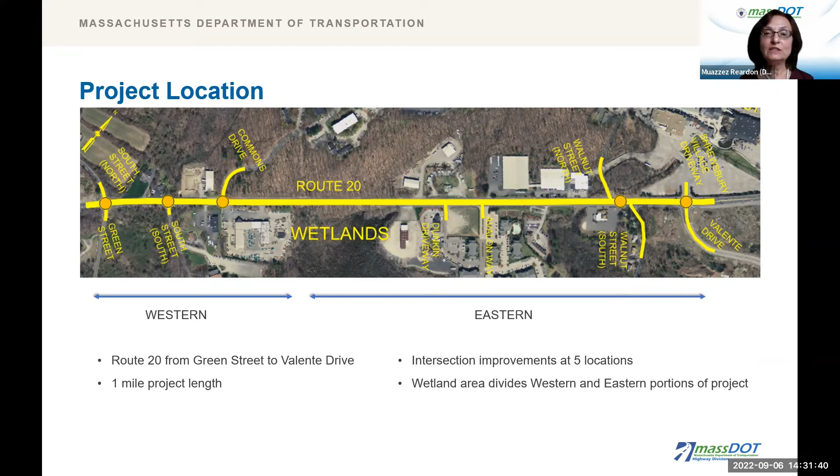For purposes of defining the existing and proposed roadway configuration, the project is split into two portions. The western portion of Route 20 within the project limits consists of 1 eastbound travel lane and 2 westbound travel lanes. The eastern portion of Route 20 consists of 2 travel lanes in each direction. In addition to evaluating the corridor, 5 major intersections were studied for improvements.

Previous to this project, MassDOT and the town worked together and prepared a master plan for the economic development of the Route 20 corridor within Shrewsbury. The planned developments along the corridor necessitated improvements to the Route 20 roadway. In February of 2020, the master plan was completed and the final public meeting was held the following month. The preferred alternatives derived from public meetings showed support for shared use paths, sidewalks, and turning lanes to improve safety and congestion issues.

In September of 2021, the road safety audit was conducted to evaluate the existing issues within the project area. After the road safety audit, alternative analyses were performed to guide the selection of the preferred alternative, which was completed in May of 2022. We will be discussing these findings with you during this meeting.

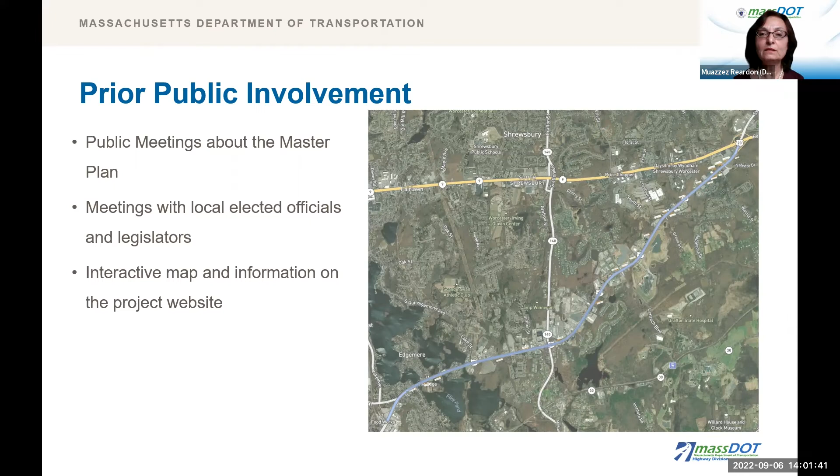Prior public involvement efforts included many public meetings regarding the master plan, including meetings with local elected officials and legislators. An interactive map was created for the initial design of the proposed Route 20 improvements, which can still be found on MassDOT's website. Now, District 3 Traffic Engineer Joe Frawley will discuss the existing issues, the alternatives studied, and our proposed design.

Thank you, Muazzez. Through the master plan effort and the road safety audit, several issues were identified within the limits of this project. The intersections of Route 20 at Walnut Street and Valente Drive are both identified as high crash locations by MassDOT. Additionally, the portion of the corridor between the wetlands and Valente Drive has been identified as having a significant rate of fatal and injury crashes.

Another concern that has been noted is high travel speeds along this section of Route 20. As part of the master plan effort, it was noted that anticipated developments near this corridor would increase the congestion that already occurs, particularly at the existing intersections. Some of the roadway deficiencies that contribute to the issues noted on the corridor include substandard shoulder widths, a lack of dedicated turning lanes, limited sight distance at side streets, and a lack of pedestrian and bicycle accommodation.

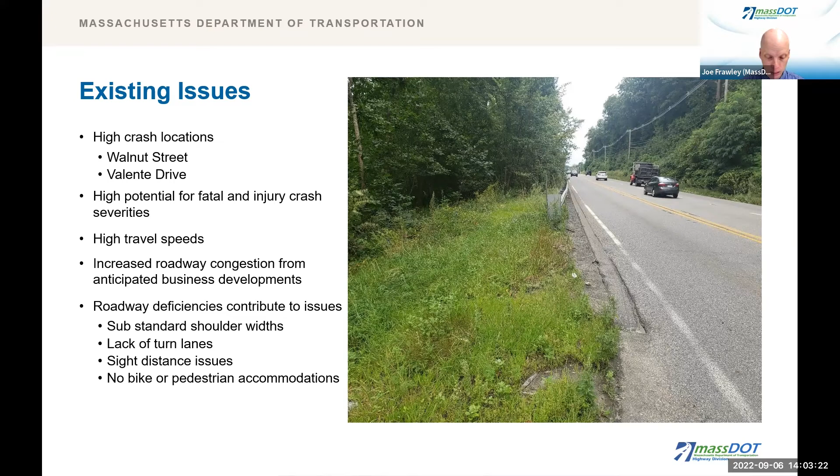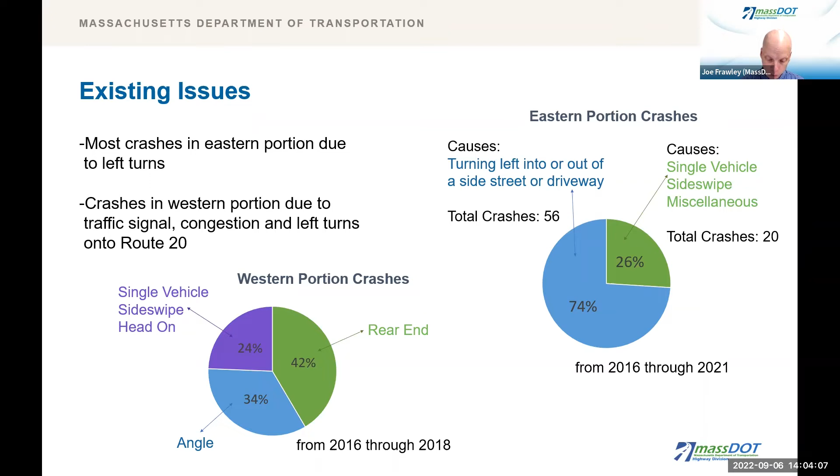During the alternatives analysis, MassDOT and our consultant took a closer look at the crashes to better understand what patterns can be identified. In the western portion of the project, many of the crashes are rear end crashes, which can be caused by congestion, additionally left turning vehicles and the traffic signal at the South Street Green Street intersection. It was found that nearly 3/4 of the crashes in the eastern portion of the project involved a vehicle turning left, either into or out of a side street or driveway.

What do we want to accomplish? The purpose of the project is to improve safety for all road users, including pedestrians and cyclists, to reduce high travel speeds, particularly to make it more difficult to travel the corridor at excessive speed, to accommodate future traffic, using projections that include proposed developments along Route 20, and to reduce congestion within the project area.

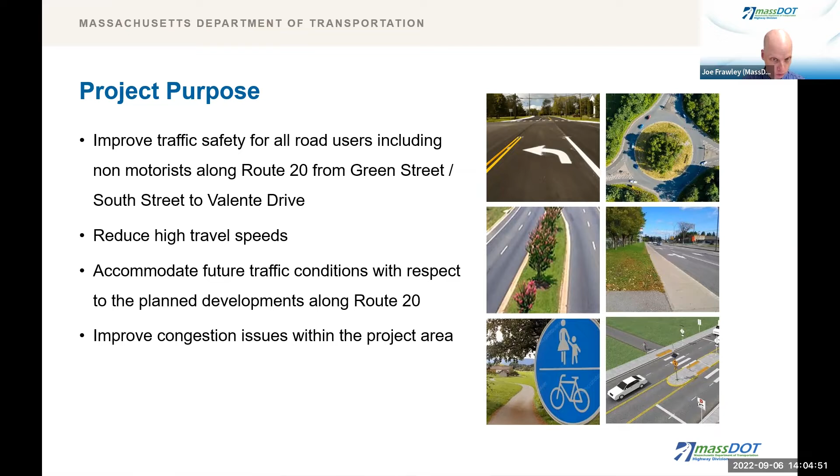What alternatives were considered? Before discussing the alternatives, I wanted to briefly show the existing cross sections along the roadway. There are 3 lanes in the western portion of the project, 2 westbound, 1 eastbound. On the eastern portion of the project, there are currently 4 lanes, 2 in each direction.

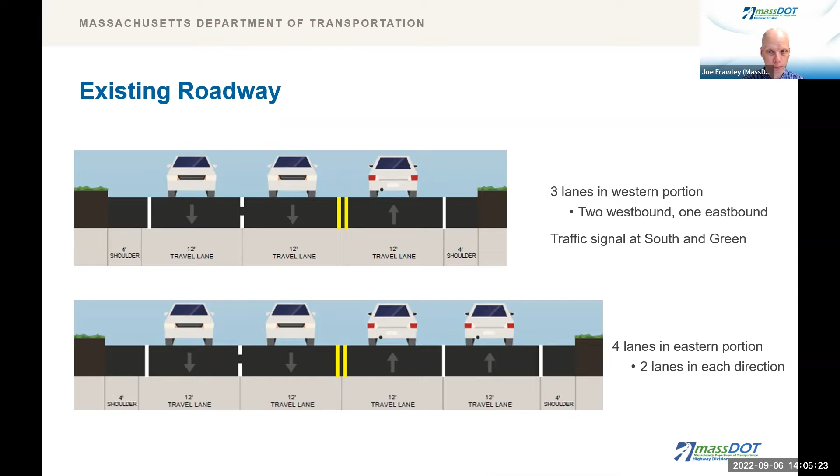This slide shows the existing control at each intersection. The South Street Green Street intersection is signalized. The South Street East intersection is not signalized, and left turns out were recently prohibited. The Walnut Street intersections are offset and both not signalized. The Valente Drive intersection is also not signalized, and both left turns and through movements out of Valente Drive are currently prohibited.

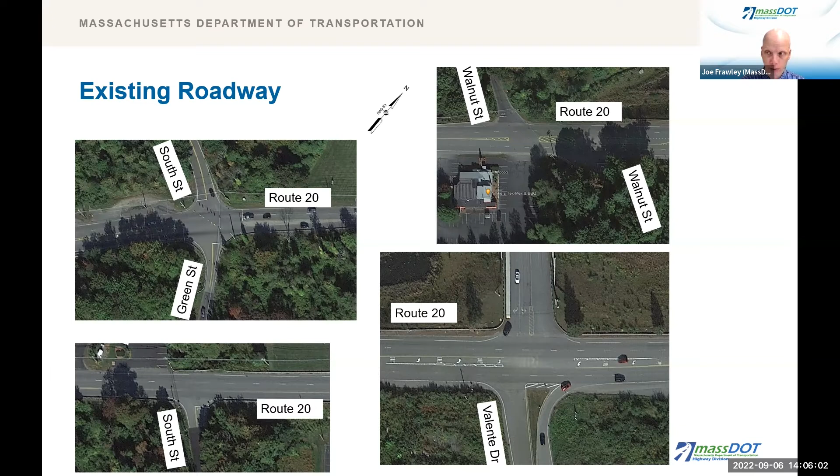The alternative 1 plan is the preferred concept from the master plan, with some minor adjustments to the cross-section dimensions to meet current MassDOT standards. This alternative provides a shared use path for pedestrians and cyclists on the south side of Route 20 and provides a sidewalk for pedestrians on the north side of Route 20.

The western portion of the project includes the addition of a second eastbound travel lane and dedicated left turn lanes at select intersections. The existing traffic signal at the South Street Green Street intersection is improved, and a new traffic signal is proposed at the Valente Drive intersection. On the eastern portion of the project, a two-way left turn lane is provided.

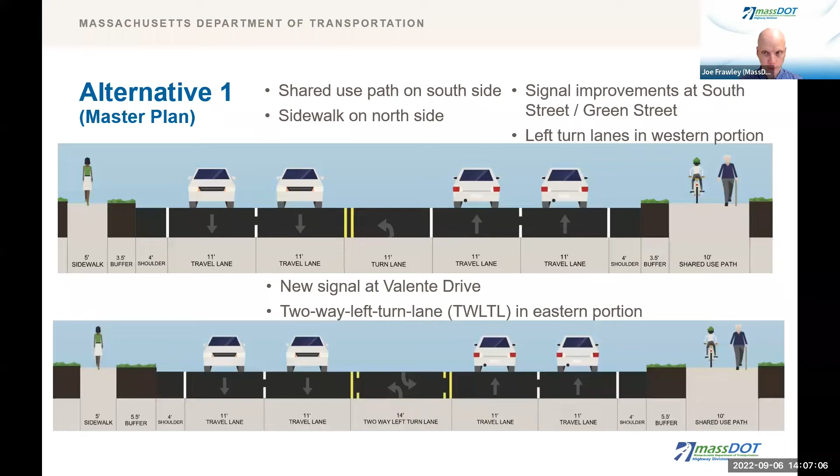This sheet shows in graphical view what is proposed as part of alternative 1. At the South Street Green Street intersection, the additional eastbound lane is shown, as well as additional turning lanes. And this shows that the traffic signal equipment is being replaced.

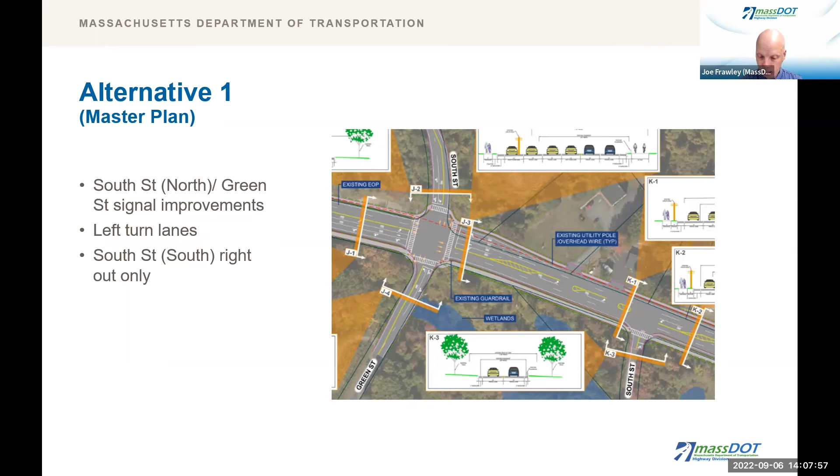At the South Street East intersection, the left turn prohibition is maintained, but a left turn lane is provided for people traveling on Route 20 westbound looking to enter South Street. As occurs today, people on South Street East looking to access Route 20 westbound need to find an alternative route.

During the master plan, a connector roadway between Walnut Street and Valente Drive was proposed to allow for turn restrictions at the Walnut Street South intersection, where Walnut Street South will be right in only. As I mentioned a few moments ago, the intersection at Valente Drive will be signalized in this alternative. The existing turn prohibitions exiting Valente Drive would be eliminated.

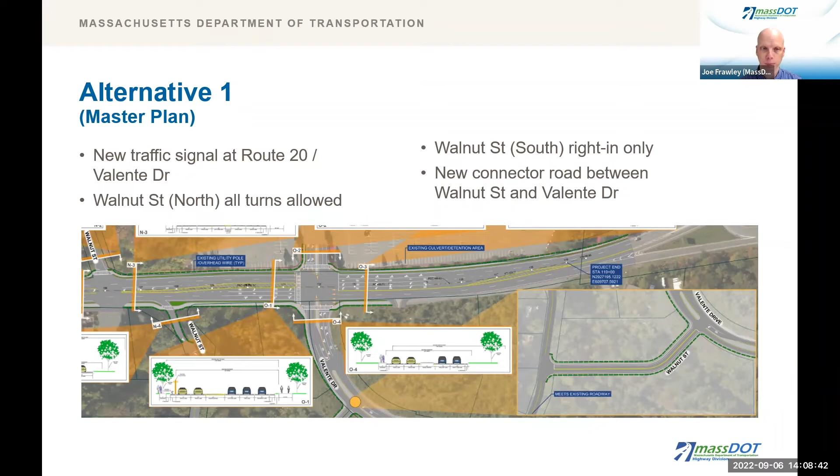Alternative 2 builds off of the master plan alternative. As in alternative 1, there is a sidewalk proposed on the north side and a shared use path on the south side of Route 20. As mentioned for alternative 1, traffic signal improvements and additional turning lanes would be provided at the South Street Green Street intersection. And South Street East would maintain the prohibition on left turns out.

However, alternative 2 proposes a roundabout at the Valente Drive intersection instead of a traffic signal. And a second roundabout is proposed near the middle of the corridor. Additionally, instead of a two-way left turn lane on the eastern portion, a raised median is proposed. This is the main difference between alternatives 1 and 2.

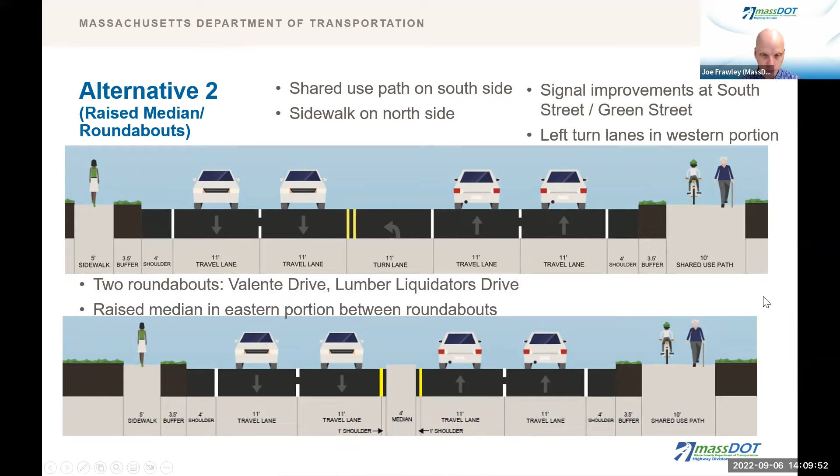What is the preferred alternative? The preferred alternative is alternative 2. MassDOT selected alternative 2 as the preferred alternative based on several factors, including safety, the ability to address the purpose of the project, and environmental considerations. We will now take a closer look at the proposed improvements for the different areas within the project.

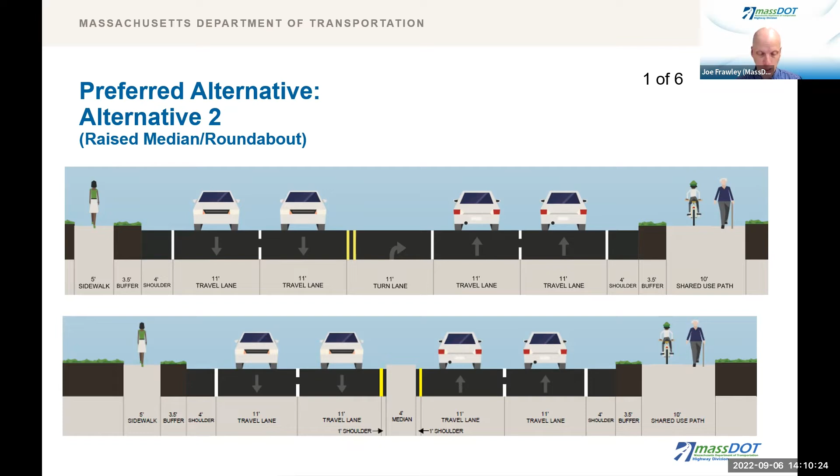The improvements proposed at the South Street Green Street intersection are very similar to those that were proposed as part of alternative 1. As mentioned for alternative 1, Route 20 westbound will have a left turn lane into South Street East, but South Street will be limited to right turn out only. No left turns will be allowed. With this alternative, vehicles will have the option to reverse direction at the proposed roundabout in the middle of the corridor, which is approximately a third of a mile away.

In the yellow color, this plan shows the 5-foot wide sidewalk that is proposed on the north side of Route 20 and the 10-foot wide shared use path that's proposed on the south side.

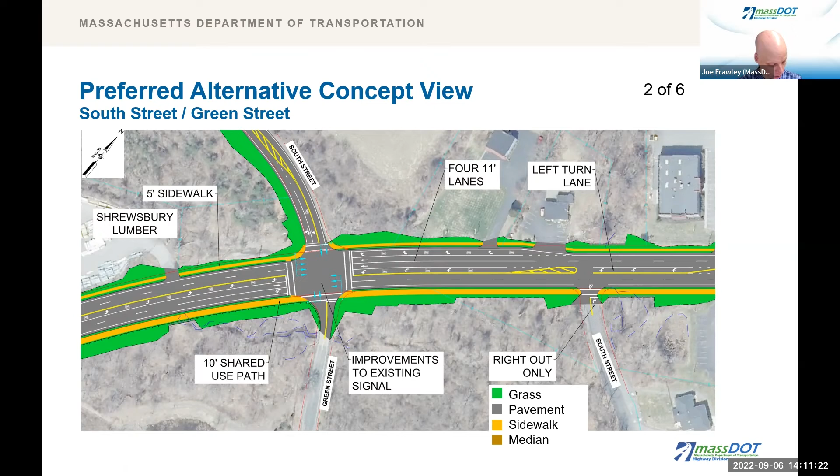Moving further east, the Sunbelt Rentals driveways will be right out only, and Commons Drive will be right out only as it is today. Left turn lanes on Route 20 will be provided for both Commons Drive and Sunbelt Rentals. A raised median will start on the western side of this wetland area. Retaining walls are proposed to avoid permanent impacts to Article 97 land that is present in this section of the project.

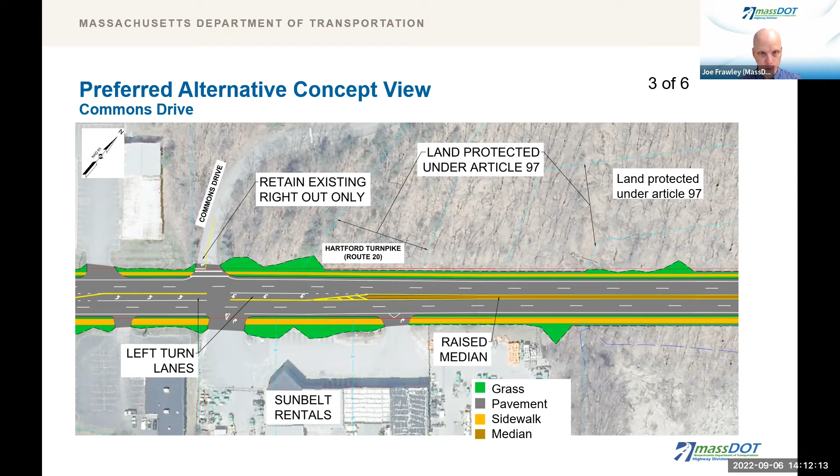A partial 2-lane roundabout is provided at the Lumber Liquidators and Rent-to-Fence driveways. The roundabout is located here to provide opportunities for vehicles to reverse direction to access all of the abutting properties between the wetlands and Valente Drive. The roundabout will be designed to accommodate trucks, including large tractor trailers. With the slower speeds at the roundabout, crosswalks across Route 20 will be provided.

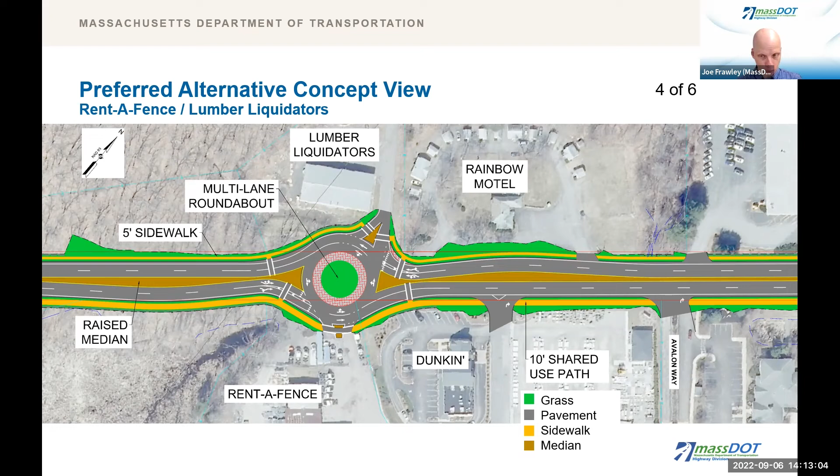A raised median is proposed between this roundabout and the proposed roundabout at the Valente Drive intersection. All driveways will be right in, right out only. The raised median is shown on this slide as well. And as mentioned previously, all driveways and the 2 Walnut Street intersections will be right in, right out only. As mentioned earlier, the Walnut Street intersection is a high crash location. So the turn restrictions, combined with providing opportunities to U-turn at both roundabouts, will provide a significant safety benefit.

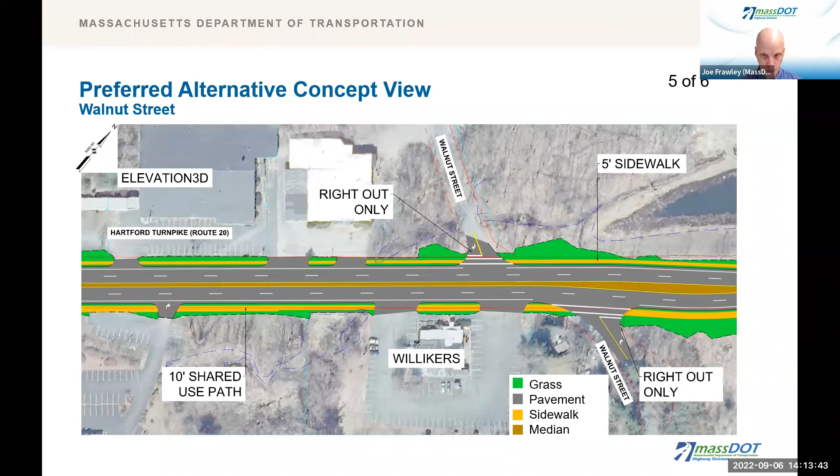A partial 2-lane roundabout is also proposed at the Valente Drive, Shrewsbury Village Shopping Plaza intersection. As mentioned for the other roundabout, this roundabout will be designed to accommodate trucks, including large tractor trailer trucks. With the slower travel speeds at the roundabout, crosswalks across Route 20 will be provided. The intersection of Route 20 and Valente Drive is also a high crash location, so the roundabout will provide a significant safety benefit. With alternative 2, the connector road between Walnut Street and Valente Drive is unnecessary, so it will not be provided.

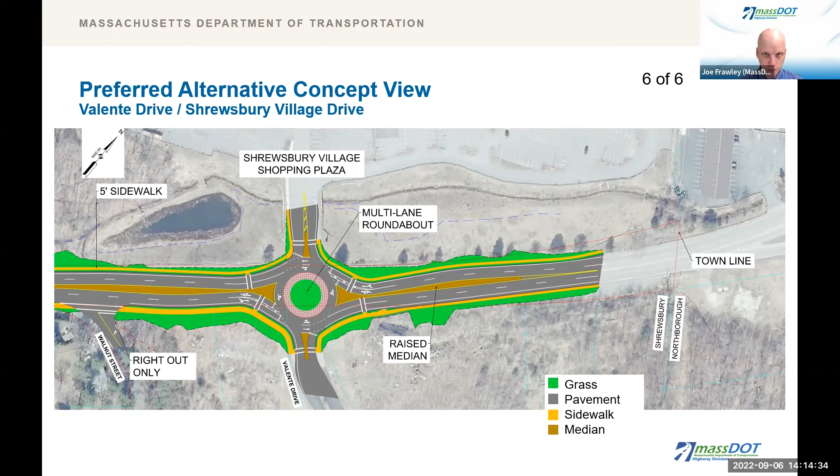Unlike traffic signals, roundabouts can be combined with a raised median to better manage access along the corridor. The existing crashes associated with left turns into and out of the driveways and side streets are addressed. It was mentioned earlier that managing speeds was part of the purpose of the project. Roundabouts include deflection that require people to slow down to 25 to 30 miles per hour at the roundabouts, regardless of the time of day.

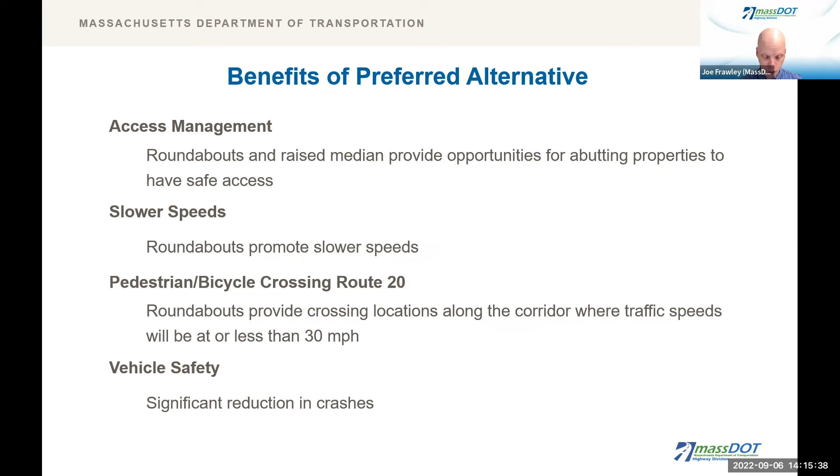Both alternatives improve accommodations for pedestrians and cyclists. The addition of the roundabout at the Lumber Liquidators and Rent-a-Fence driveways provides an additional safe location for pedestrians and cyclists to cross Route 20. The preferred alternative provides a significant reduction in the number of crashes.

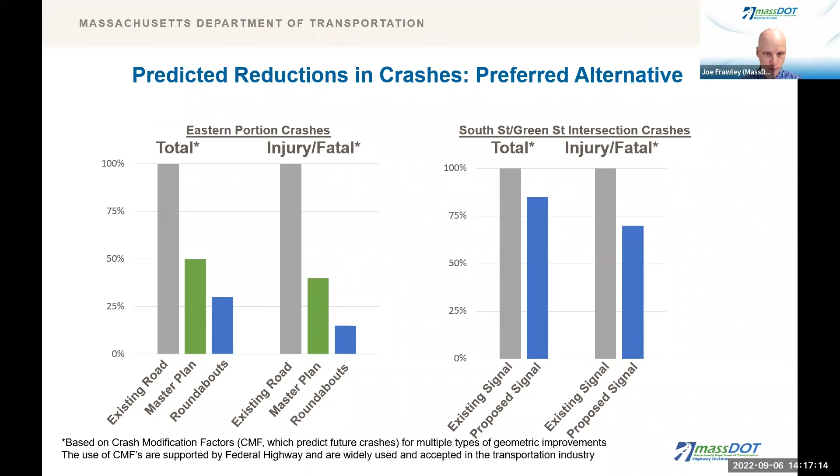MassDOT has been building roundabouts throughout the state and throughout central Massachusetts for a number of years because they have been found to have many benefits when compared to other intersection types. Roundabouts have fewer conflict points, fewer crossing conflict points, and slower speeds at the intersection, all of which have been demonstrated to significantly reduce the number of crashes that can result in either an injury or a fatality. Roundabouts do not require stopping at a red light, so usually there is less vehicle pollution. Additionally, the roundabout center island provides opportunities for landscaping at several locations along the corridor.

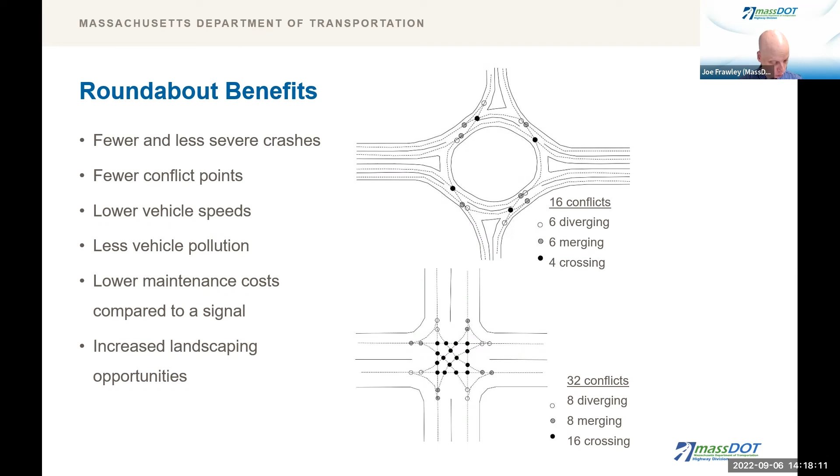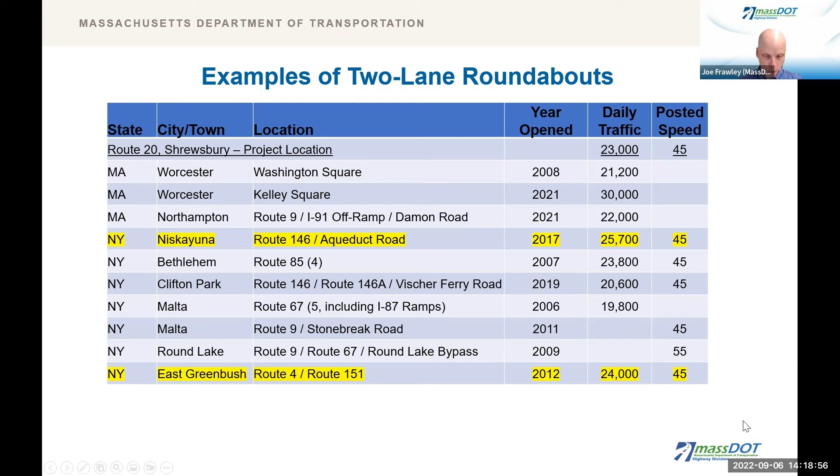These two sample locations, one in Niskayuna, New York, and one in East Greenbush, New York, have traffic volumes that are similar or higher than the Shrewsbury locations and have approach speeds that are the same. In both of these cases, the roadway with the high traffic volume and the high approach speeds runs from the top of the page to the bottom of the page. I've been through both of these roundabouts, and they both seem to operate well. This helps confirm the operational analysis that's been done for the roundabouts in Shrewsbury, which show that they will operate well, even in peak hours under future traffic volume conditions.

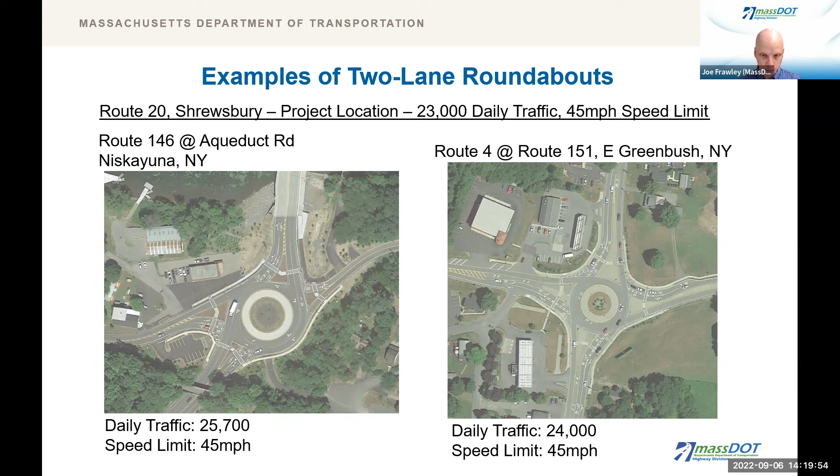How will pedestrians and bicyclists be impacted? The project will include a shared use path on the south side of Route 20, a sidewalk on the north side of Route 20, and roadway shoulders, vertical curbs, and grass buffers will all be provided, which will help separate pedestrians and bicyclists from vehicles in the roadway. The project will also introduce crosswalks across Route 20 on the eastern end of the corridor at Valente Drive, in the middle of the corridor at the Lumber Liquidators and Rent-A-Fence driveways, and at the western end of the corridor at the intersection of South Street and Green Street.

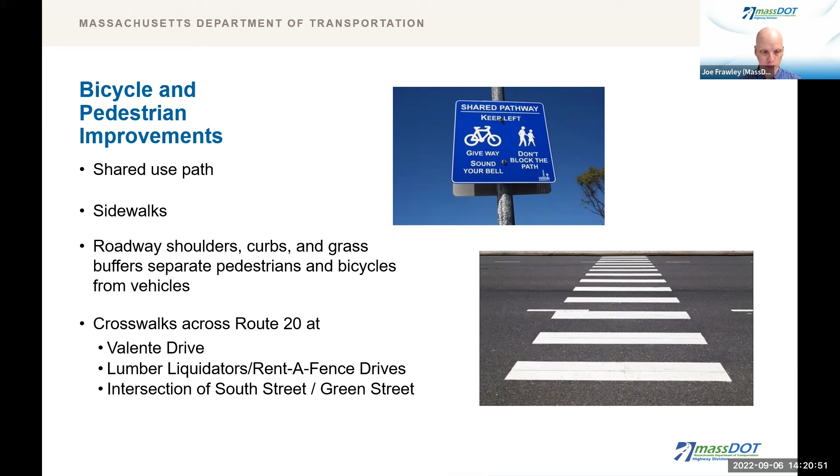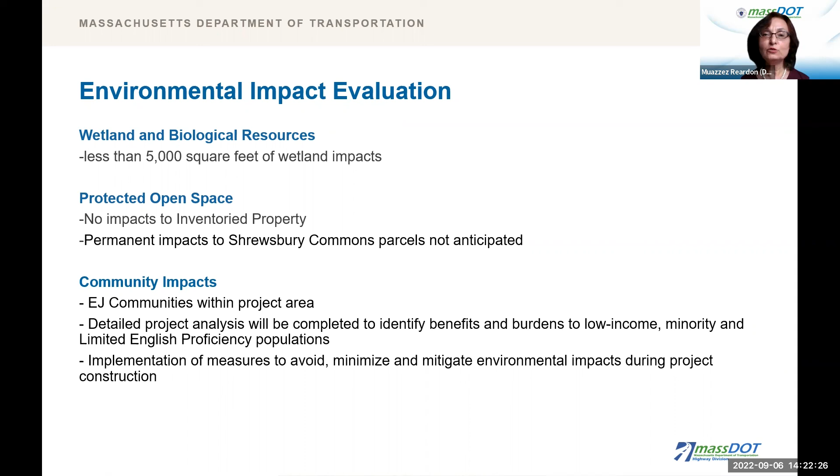Environmental permitting. Measures to avoid, minimize, and mitigate environmental impacts during project construction will be implemented. As the project advances, any impacts that are identified will be reviewed by the appropriate agencies. The town and its residents will be notified and engaged throughout the entire permitting process.

What is the construction approach? Access will be maintained during construction. There will be lane closures and traffic shifts. Bicyclists and pedestrians will continue to have access to the roadway during construction. If necessary, roadway closures and detours will be limited to short durations.